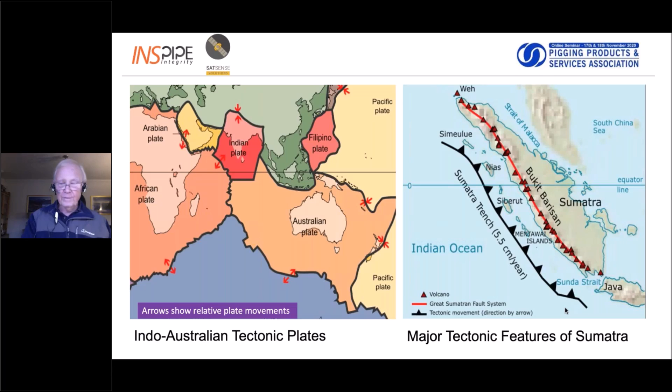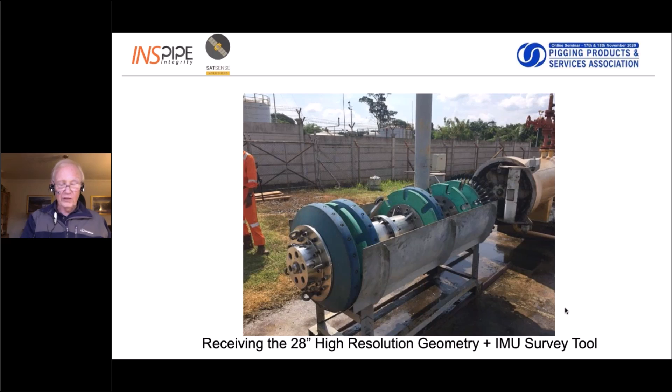This slide shows the 28-inch diameter high-resolution geometry tool being received in excellent condition. The tool was fitted with a high-definition inertial measurement unit, or IMU, which measured the precise 3D location of the pipe center line as X, Y, and Z coordinates. IMUs are fitted as standard to most Inspipe geometry tools in order to improve the identification of pipeline features such as welds. The combination of a high-resolution geometry tool with a high-definition IMU system is not really common in the industry for a variety of reasons.

This is showing a close-up of the geometry tool in the receive tray. The sensors can be clearly seen on the right-hand side there. There are 56 of them, and they're capable of measuring a 1 millimeter variation in the diameter of the pipe. And they're all running on wheels to provide a smooth transit over the pipeline internal surface.

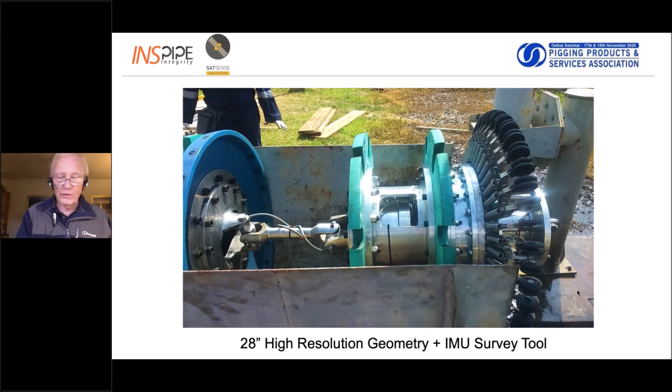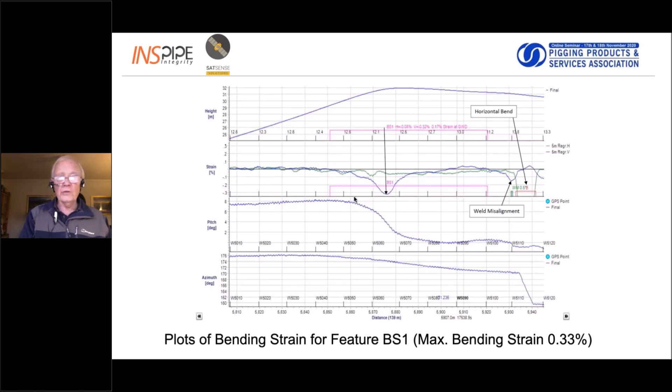The key graph, of course, is for strain, which is the second down here, and it shows the total strain plotted as a function of distance along the pipeline, and it clearly shows the peak strain lying between 2 girth welds here. At this point, I'll hand over to my colleague Pranav Pasari, who will continue with this presentation.

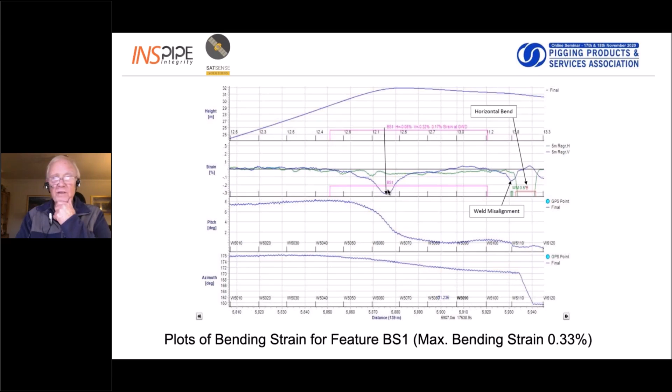Thank you, Derek, for covering the first part of the presentation so well. Could you go to the next slide, please?

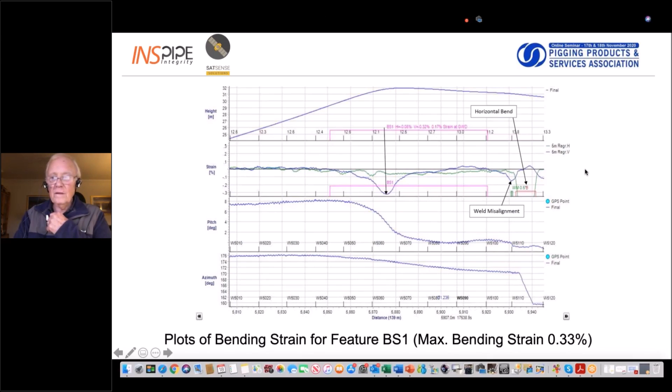So before we get into the technical details and results of the satellite-based ground disturbance analysis, I would like to present a brief overview on the concepts and the technology used. Satellite remote sensing is the use of space-borne sensors to monitor activity and changes on the ground, in this case, activity and changes near our pipelines. In this case, we use synthetic aperture radar, also known as SAR, and interferometric SAR processing techniques to detect ground disturbances between specific time periods.

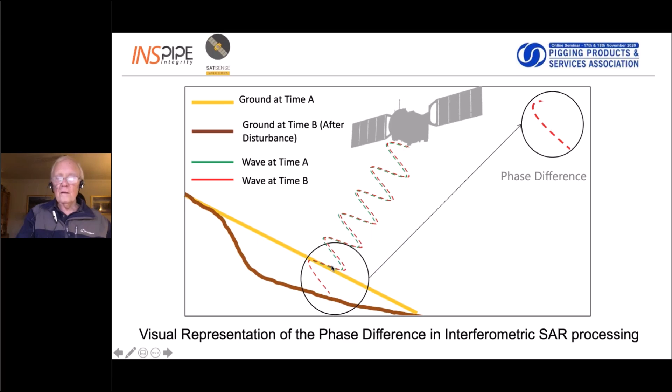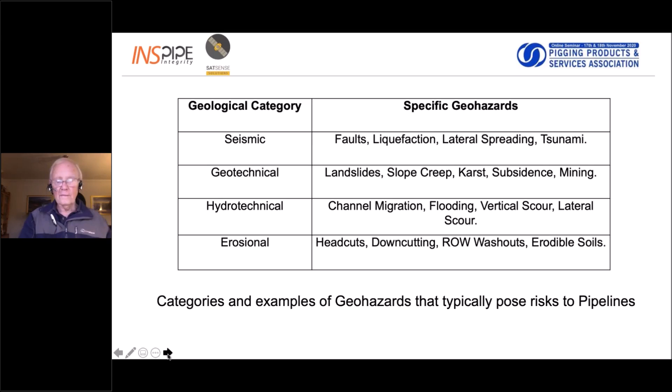While this paper addresses only the impact of ground disturbances due to seismic and geotechnical phenomena, we will be showing examples of some of the other categories as well. Next slide, please.

Presented here is a schematic for the different types of satellite remote sensing analyses we can use to assess specific geohazards. In this paper, we perform the ground disturbance analysis that looks at both seismic and geotechnical geohazards. Pipelines are especially susceptible to ground disturbances due to the long linear nature of their paths that may pass through afflicted areas. Ground disturbances can cause displacement of pipelines as well as longitudinal, tensile, and compression loads. Next slide, please.

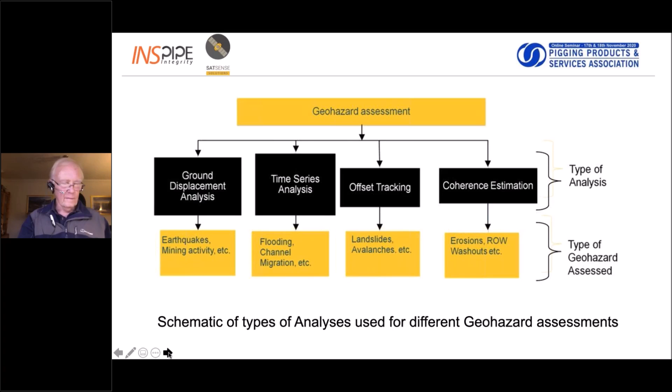In this slide, we would like to show you some examples from other projects of the different types of geohazards and how they impact pipelines. At the top, we see an example of hydrotechnical hazards in the form of channel migration or river meandering. In this case, we see the river channel interaction with the pipeline as it changes path in 2010, 2014, and 2019. We can see that in 2010, the river was particularly active, crisscrossing the pipeline at several additional locations.

On the example on the right, we see an ROW washout, where soil over the pipeline has been washed away due to heavy rains. On the left, we see an example of seismic activity from a swarm of 55 low-intensity earthquakes within a period of 1 year that caused ground subsidence of 2.8 to 5.6 centimeters. The impacted pipeline was around 1.5 kilometers away from the epicenter. Next slide, please.

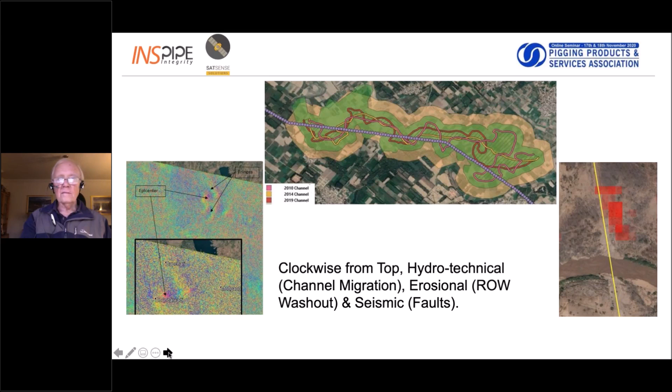So coming back to the current paper, if you recollect, Derek had highlighted 5 bending strain areas identified from the IMU analysis. The locations of these are seen here in red dots. BS1 near a riverbed is seen on the image on the left. BS2 through BS5 are seen from left to right in the image on the right near the coal mine.

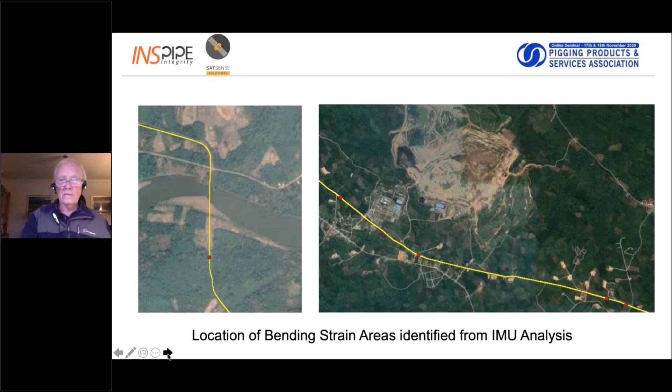BS4 and 5 seen in the right-hand corner seem to be some distance away from the main coal mine and hence seemingly away from possible geohazards. They are in fact very near coalbed methane wells, as can be seen from the satellite imagery. Therefore, the pipeline in this area may still be impacted by geotechnical ground displacements caused by drilling and water pumping occurring here. We shall see results of the ground displacement analysis and how it pertains to these points in the next slide. While BS1 may have been impacted by hydrotechnical phenomenon, this has not been evaluated as part of this project. Next slide, please.

In this slide, we see the results of the ground displacement analysis performed using satellite SAR data and interferometric SAR processing techniques. This analysis was performed for the time period between August 2016 and August 2018. This was done to coincide with the IMU survey that was performed in early September 2018. The ground displacement data is extracted for points corresponding to the IMU survey and provided in a tabulated format as seen in the table. A strong correlation was found between the 5 bending areas and the ground displacement analysis performed here.

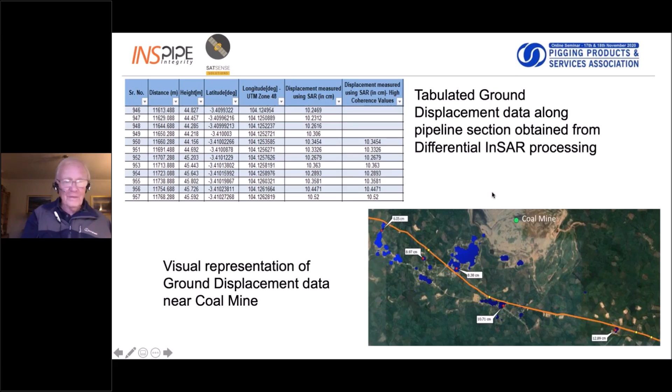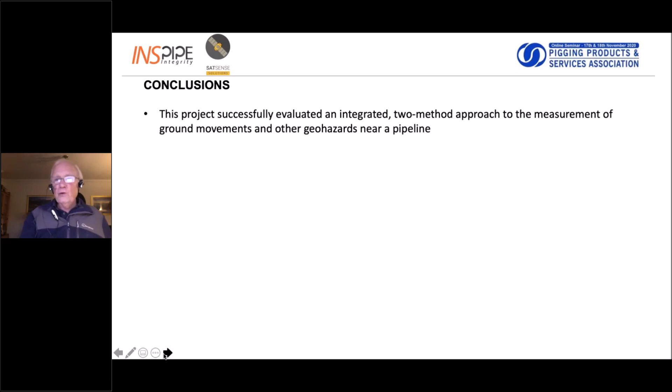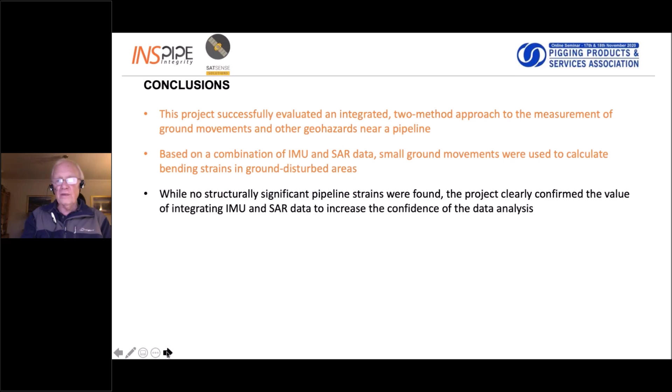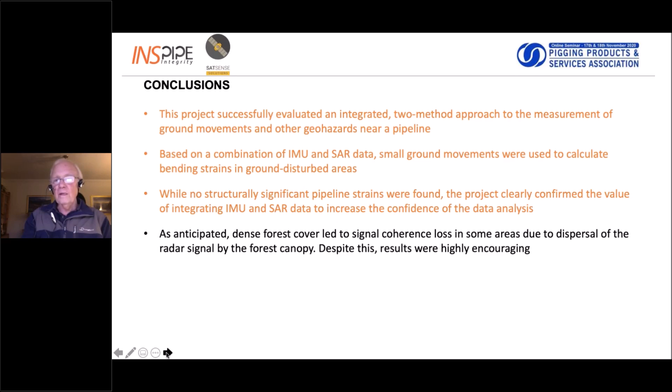So, conclusions. This project successfully evaluated an integrated 2-method approach to the measurement of ground movements and other geohazards near a pipeline. Based on a combination of IMU and SAR data, small ground movements were used to calculate bending strains in ground disturbed areas. While no structurally significant pipeline strains were found, the project clearly confirmed the value of integrating IMU and SAR data to increase the confidence of the data analysis. As anticipated, dense forest cover led to signal coherence loss in some areas due to dispersal of the radar signal by the forest canopy. Despite this, results were highly encouraging.

Further development of the combined IMU-SAR methodology is already underway in a partnership between Inspipe Integrity Limited and Satsense Solutions Limited. Future work will refine the methodologies and the technologies involved, including analysis of historical data for each method to enhance the predictive capabilities of the integrated analysis.